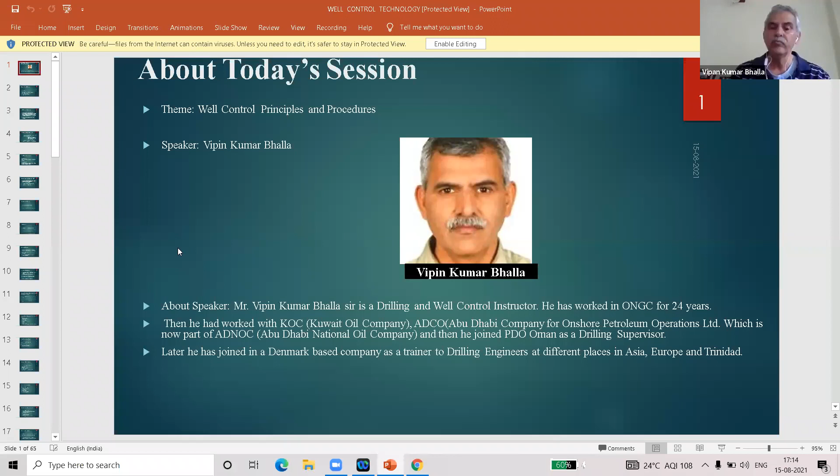In this program, we will be discussing the causes of kicks. First there will be a basic introduction, then causes of kicks, what is primary, secondary, and tertiary well control, what is the blowout preventer stack, and what other equipment is involved in well control, kick detection systems, and finally what are the methods of killing a well.

If we look at what is well control - well control is about not allowing, when we are drilling a well into very high pressurized formations, what is stopping those high pressurized formation fluids from coming into our well? If they come into our well, there will be some obstruction. Our job is to drill with mud and keep drilling. If some fluid from the formation comes into our well, that can be an obstruction, and we don't want that. So when we are drilling a well, what is stopping them from coming into the well? That is the question.

Sorry for the interruption sir, can you switch off your video? I think the voice is breaking. Oh, is it breaking? The audio will become better. Yes, voice is breaking. Okay I'll do that, it's a very interesting topic. Okay, I got a message in the chat box that voice is breaking. Okay, so now it may be better, right? Yes sir, better than before. Okay, it will slowly get better.

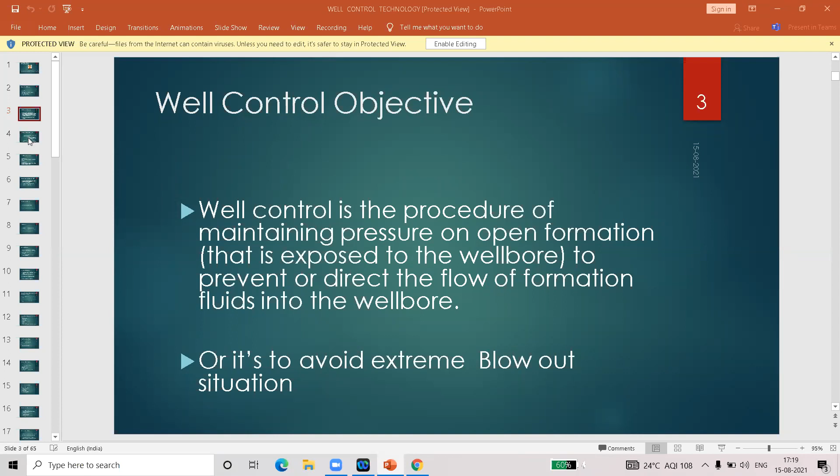Now, as I said, your mud hydrostatic should always be more than the formation pressure. And if it is less, that means you are underbalanced and there is a possibility of a kick. Kick means influx, or formation fluid entering into the well and creating problems for you.

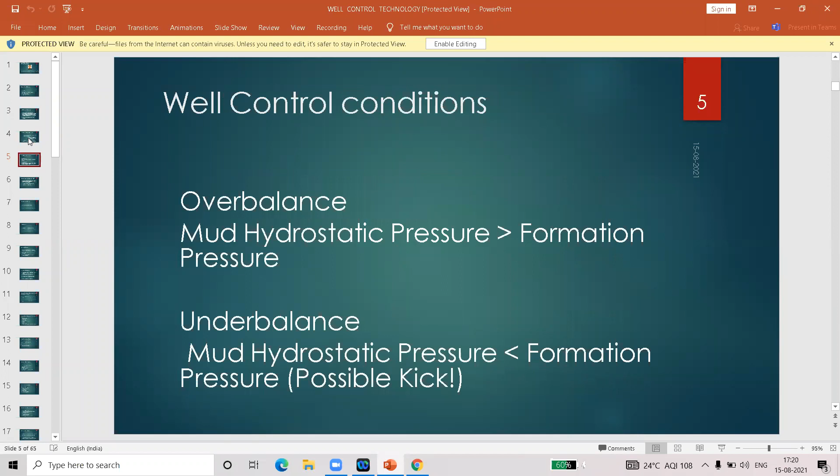What is secondary well control? Suppose some influx happens for some reason, your mud density was not sufficient. Maybe you are drilling a well into a formation which had much higher formation pressure than the density of mud you had chosen. So naturally, formation fluids will enter the well. Now what should be your action?

If suppose you don't do anything, those formation fluids, which can be gas, will come into the well, migrate up, expand, and throw all your mud out of the system and create a blowout situation. And to save from that, we have another element which is BOP. That is the secondary element which can help us control a well control situation once our mud has failed. So mud was our primary barrier, and secondary barrier, if suppose mud fails, is our BOP system, which can be called a secondary well control barrier.

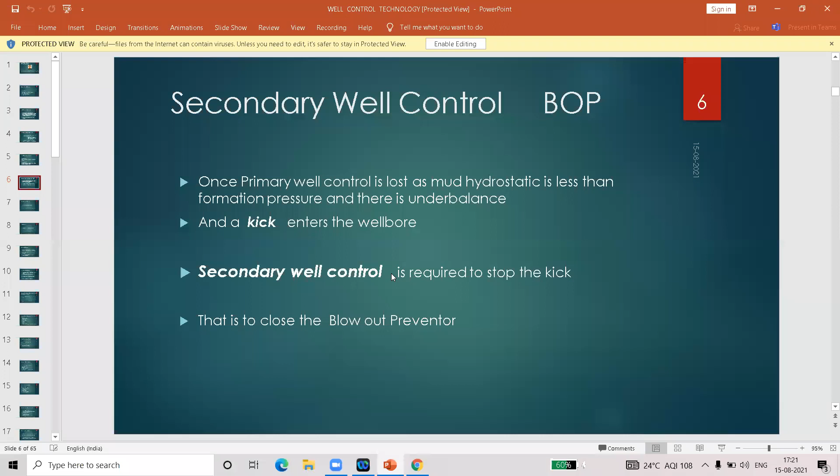To control that, tertiary methods are used, like capping arrangements. Many experts come for that, and they try to cap the area with certain equipment, cranes and other equipment, and then they try to control it. Even if that fails, they may drill another well at a distance and make that well meet this well, and try to push very heavy mud into this well to control it, which is called a relief well. This is a little difficult, so I'll not go much into it.

I'll make it simpler. This is called tertiary well control, which is used when a blowout has happened and you are to control that. It may take 3 months, 4 months, 6 months.

So these are the barriers. As I said, primary is your mud in the well, and secondary is the BOP system with other allied equipments. These barriers should be tested from time to time. If you don't test them and ensure they are okay, they are no more barriers. If you don't measure your mud weight and it's not maintained the way it needs to be, it's not a barrier. If your BOP system is not tested properly time to time, you cannot assume it to be a barrier.

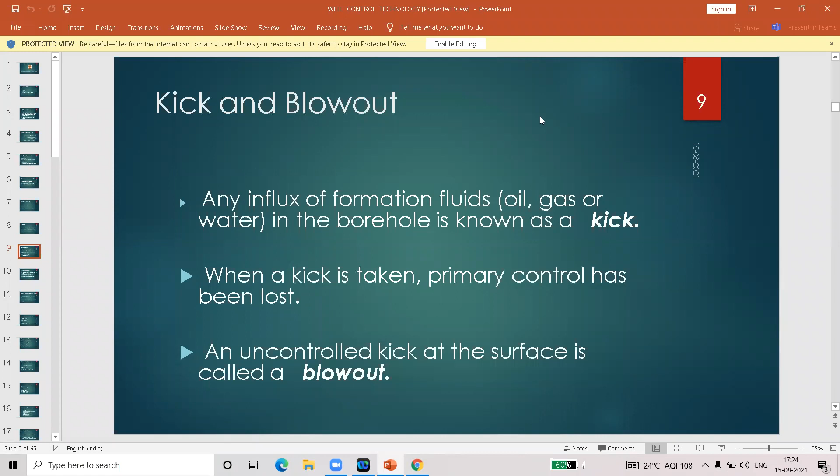So our job is to remain overbalanced. Overbalance is keeping the mud weight such that the hydrostatic pressure at the bottom, because of the density of the mud, is always more than the formation pressure.

That is our strategy, but sometimes you may go underbalanced. You may not be able to maintain a higher mud weight at the bottom. Maybe you drill into a formation which has unexpectedly more pressure than your mud density, so then formation fluids will come in and you will get a kick.

Now, why are such abnormal pressures there in the formation? We should be careful about such pressures which formations may have, that they may come into the well and create problems for us. That is why we should give some attention to what type of reasons create the abnormal pressures in the formation, and what is normal, what is abnormal, and what is subnormal.

What is normal is if the pressure in the formation is because of saline water. All formations have saline water in them. These formations are sedimentary rocks, and sedimentary rocks have pores in them. These pores are interconnected, and they are filled with generally saline water of density, say approximately 8.9 or around 9 pounds per gallon. If the formation is filled with this type of saline water, that will create a gradient of 0.465, and if that is the condition, it will be a normal formation.

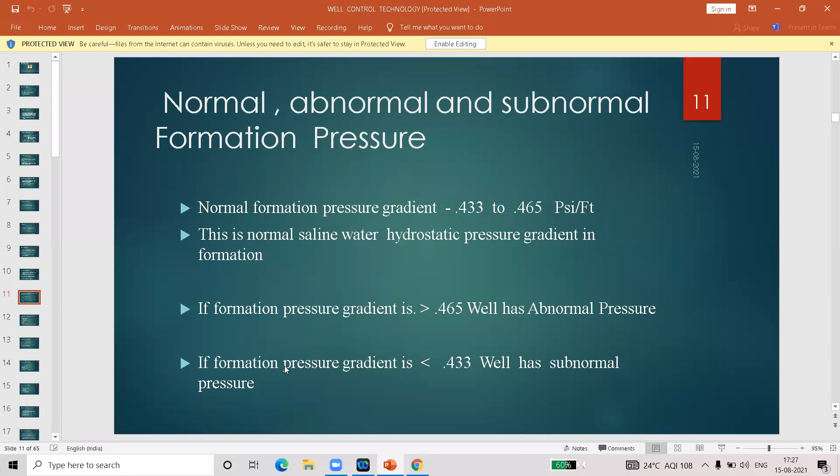Now, why do abnormal pressure formations occur? If we know that, then we can be careful while drilling, knowing we may be entering an abnormal formation zone. In an exploratory well, you don't know what type of formation you are going to encounter. Of course, geoseismic surveys have given some data, but it's a wildcat well. You don't know what you are going to encounter, or what type of pressures will be there. There may be abnormal pressure.

So we should know what are the characteristics of abnormal pressure, why they occur, where they occur, and what will be the symptoms, so that a drilling engineer can be awake, monitor, and catch the abnormal pressure zones before they catch him.

One of the reasons for abnormal pressure is undercompaction of the shale. This happens at the time of sedimentation, if by geological movements a high pressure is created in the fluids at the bottom, and those fluids at high pressure don't get a chance to deplete because of impermeable formations above them. The fluids at certain depth may get high pressure because of earth movements and geological reasons.

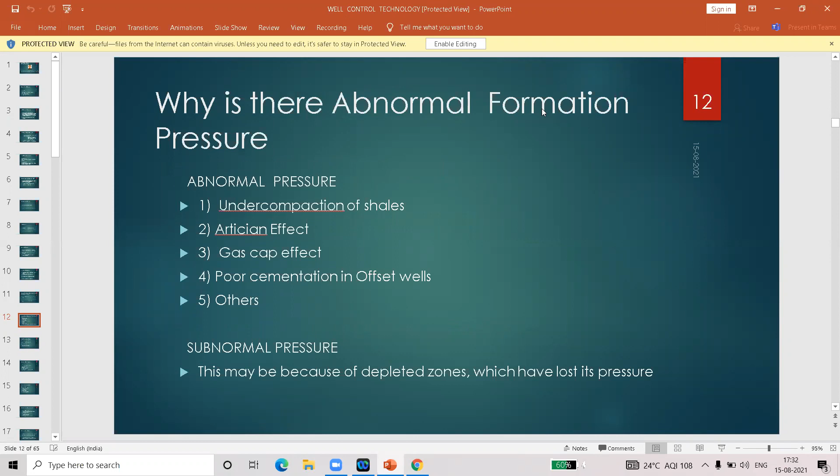The second thing is that your mud density may not be controlled properly, or your mud level in the well may fall for some reason. There can be mud loss, where the mud volume in the well gets lost into lost circulation, causing the level to fall, and that may induce a kick. So you need to ensure that your well is always full of mud.

That mud density creates a hydrostatic pressure at the bottom, which can handle the formation fluid pressure. So bottom hole pressure from the mud density, that hydrostatic pressure, is very important to maintain to ensure no kick occurs, unless some very high formation pressure is encountered.

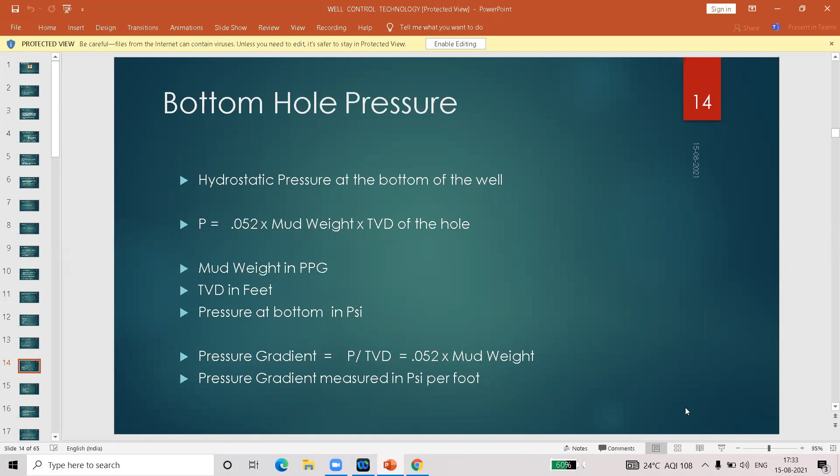Now we will see how to ensure that we catch the abnormally high pressure zones before they strike us with a kick. Now, how can a kick occur?

Suppose your bit is worn and you want to pull it out to change it. Let's analyze this situation which can create a kick. I am drilling, my mud density is good enough, no kick is coming, the hydrostatic pressure of the mud is more than the formation pressure, everything is fine. Suddenly my bit is not drilling anymore, so I want to pull it out. I slowly start pulling out to change the bit. When pulling out, I may be pulling too fast, or my bit may be clogged with cuttings, and it may act as a piston, sucking the formation fluids into the well. That sucking action, like a piston when you pull the string out of the well, can swab formation fluids in, and that can cause a kick.

Or there can be a kick like swabbing, and when you want to know whether the kick is there or not, you circulate the well, and when that kick comes up it will expand, because the pressure at the top is less than at the bottom. So if it is expanding, it will invite more kick. Or if there is lost circulation, your hole is getting empty because of the loss, and the mud which you require to create density and hydrostatic pressure to maintain the formation pressure is no longer available to you because it is getting lost. So that can also create a kick situation.

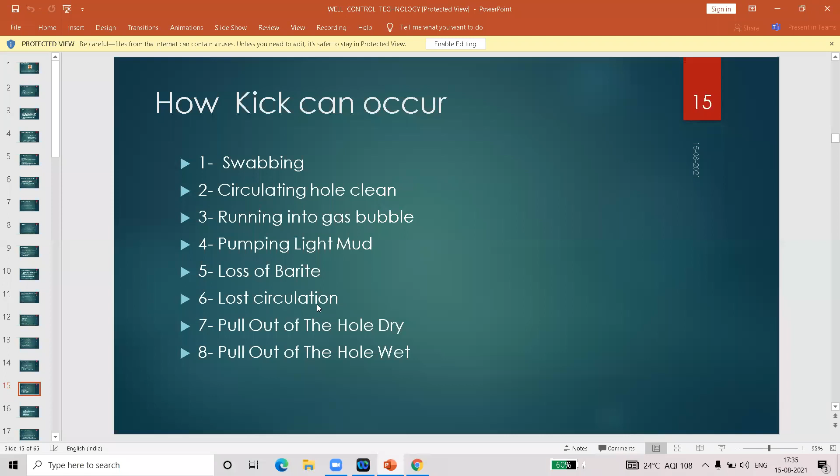This is what mainly I wanted to communicate. We are drilling an exploratory well, and we don't know whether there will be high pressure formations or not. We are unaware; we have some idea about the geology from the seismic data. It is a wildcat well, so not much is known. We are drilling in an unknown domain. So how will you know whether you are going to encounter, or are approaching, a very high pressure zone?

So these are the symptoms. One symptom is that your rate of penetration, the drilling rate, may increase suddenly when you encounter a high pressure zone. Generally those zones are more porous and they are at high pressure. When they are at high pressure, they throw the cuttings which you are cutting with the bit up into the mud stream very soon, and your drilling rate increases. So if your drilling rate unexpectedly increases, you should be careful, be watchful. Number one, there may be a porous high pressure formation zone.

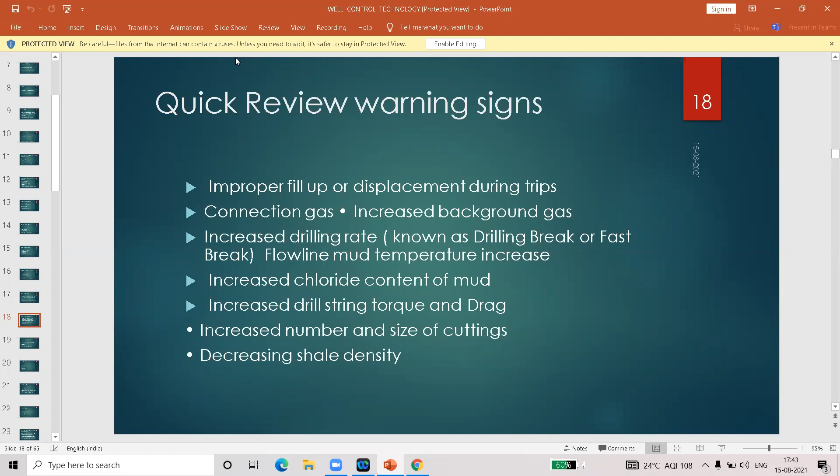This whole monitoring process needs to be done properly to avoid the risk of getting a very big kick from a high pressure formation zone. Now, all of these that I discussed were warning signs, not sure signs. They tell you that you may be going to encounter a high pressure zone, or that you may be approaching one. These are the warning signs.

Then there are some positive signs. These signs don't give you a warning; they tell you that you have already entered a high pressure zone with pressure more than your mud density can handle. If you're drilling and pumping mud into the well, your ingoing mud flow rate should equal the outcoming mud flow rate. But if the flow rate of the outcoming mud is more than the ingoing mud, that shows you have already got a kick. You have encountered a high pressure zone.

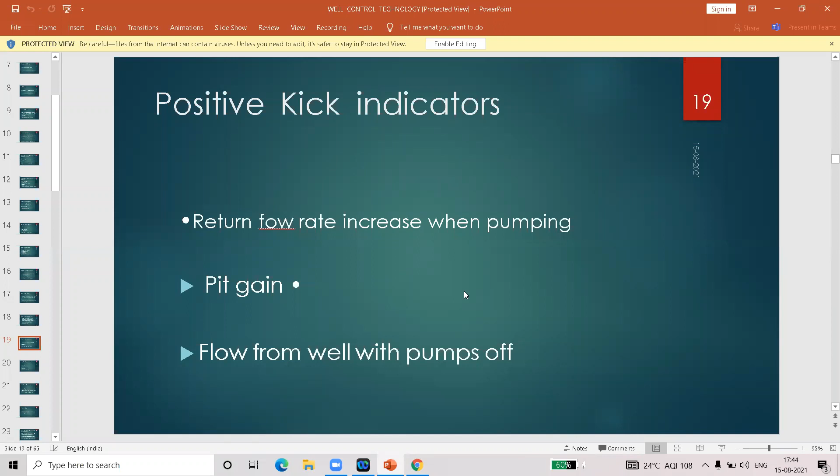Kick is already there. If your pits, from where you are taking the mud, receive the same mud after drilling and that level is being maintained, but if that level is slowly increasing, that shows some influx has already entered your well. These are the symptoms that tell you it is not a warning, it is a positive sign that a kick has happened. And if a kick has happened, what should be your action?

Your action should be a hard shut-in of the well. You will stop rotating the bit, pick up your Kelly or string to a position so that there is no joint inside the BOPs and there is free pipe inside the BOP. Stop pumping, close the BOP, and then open the valves required to record the pressures. That is what a drilling engineer does. This means there was a high pressure zone and your mud weight was not sufficient, so a kick came into the well, but a good drilling engineer followed the hard shut-in procedure, shut in the well, and recorded the pressure. These pressures will tell you how much greater the high pressure zone's pressure is.

Hello, I got one question if you don't mind. Yeah, tell me, ask me.

What can we consider the shut-in tubing pressure before the bullheading technique, if we already bled off the well to zero? Consider we have a bullheading technique to kill the well. We've bled off the well to zero, and we want to kill the well so as to squeeze the static level into the perforation. How much can we consider the shut-in tubing pressure?

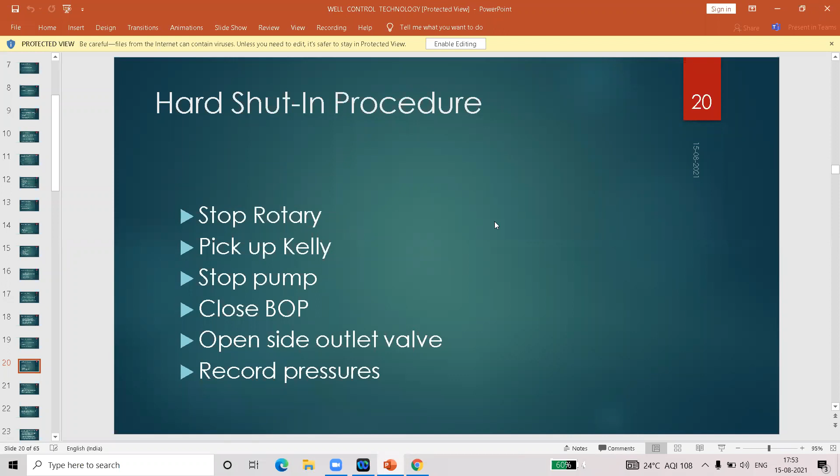Okay, BOP system. Now we will talk about the secondary well control system, BOP, and other allied equipment which are used. So before I do that...

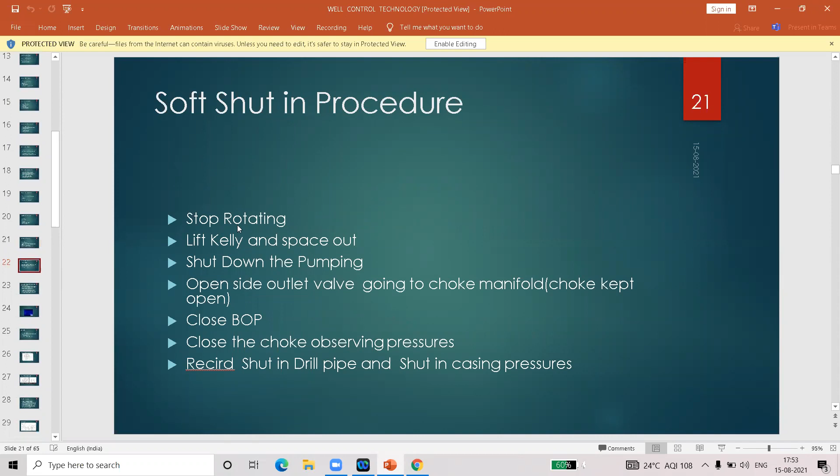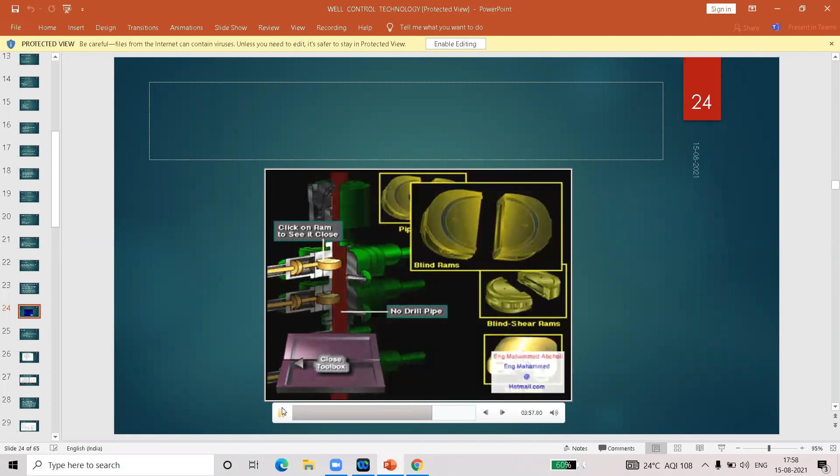Yeah, sir, sorry to disturb. There's no audio in this video, I guess.

Okay, we can't hear anything. All right, so is the audio very poor? I think the audio was muted, we couldn't hear anything. Good, but you could see the diagram and you can see the observation. Yes, sir. I don't know, I have not muted myself, but just see.

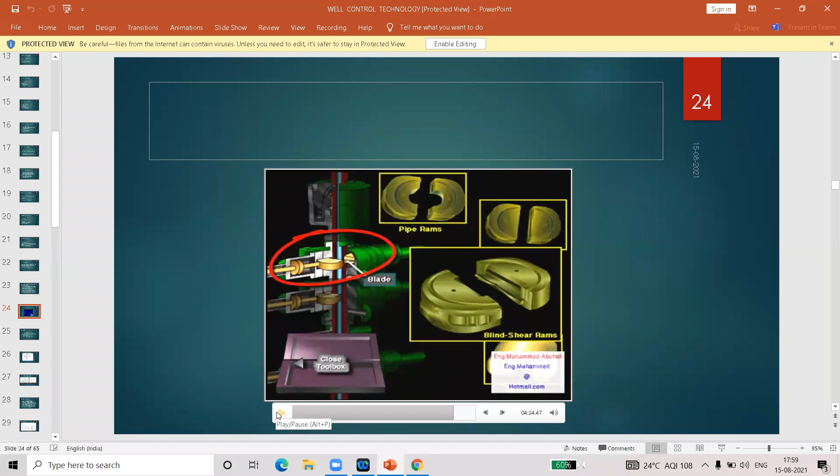It's a few minutes more, just see and observe how BOP works. Variable bore rams, or VBR, are special pipe rams that can close over a range of pipe sizes, such as 5-inch diameter to 3-inch diameter.

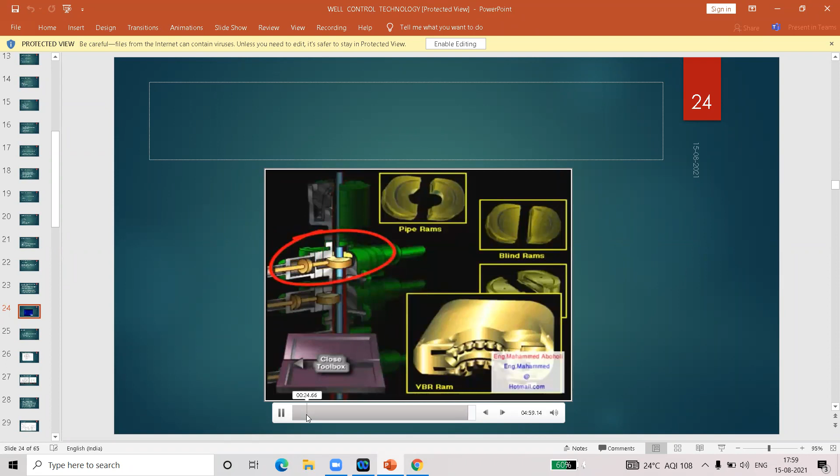Okay, so this was the BOP system. Is my voice audible? Yeah, hello. Yes, sir. Okay, okay, thank you.

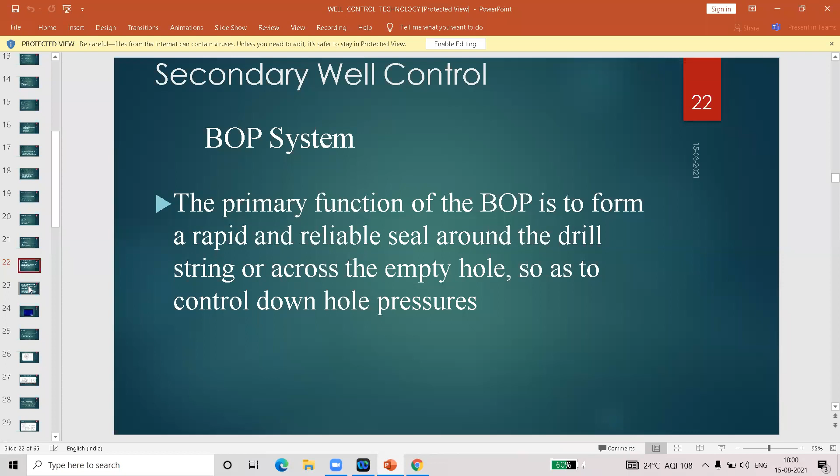This video was the animation of the BOP system to give you a sense of how the BOP acts as a secondary barrier. If the mud, as a primary barrier, fails, then we use the secondary barrier, which is BOP, to close the well, and now the well is closed. Your first job after closing the well involves this secondary barrier, your BOP, of which there are many types, as you might have seen: RAM BOP, annular BOP, blind shear ram, blind ram, depending upon the different situation you act on. If it is a very emergency situation and you are not able to control anything, you may have to shear the pipe and close the well also.

In normal conditions, you may use an annular BOP or RAM type BOP, which you have seen. There are different sizes of BOP and different pressure ratings, maybe 5,000 psi to 20,000 psi, and different sizes depending on what type of well you are drilling. If you are drilling a very deep well, you may need some other size, and if shallow, some other size may be sufficient. Also, how much formation pressure you are going to encounter will decide the rating of the BOP to be used.

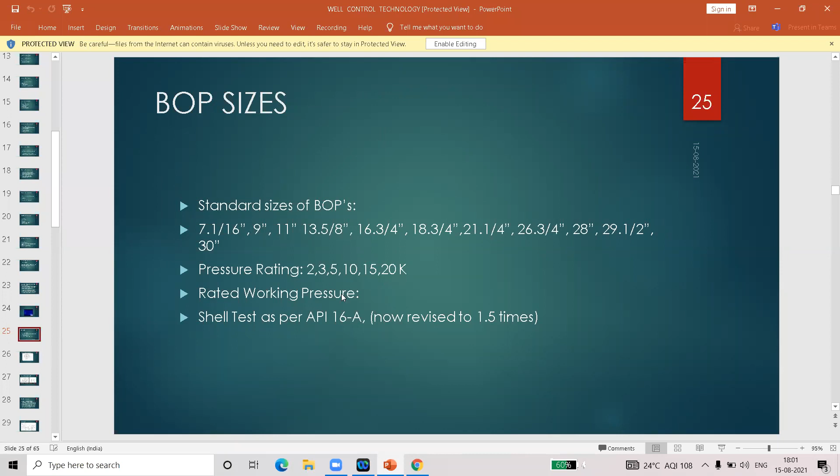So this is one type of BOP, and another is the RAM BOP. It is also operated by hydraulic fluid, which pushes a piston. It has a ram in front with an opening, as seen in the video, which closes across the drill pipe and can close the well.

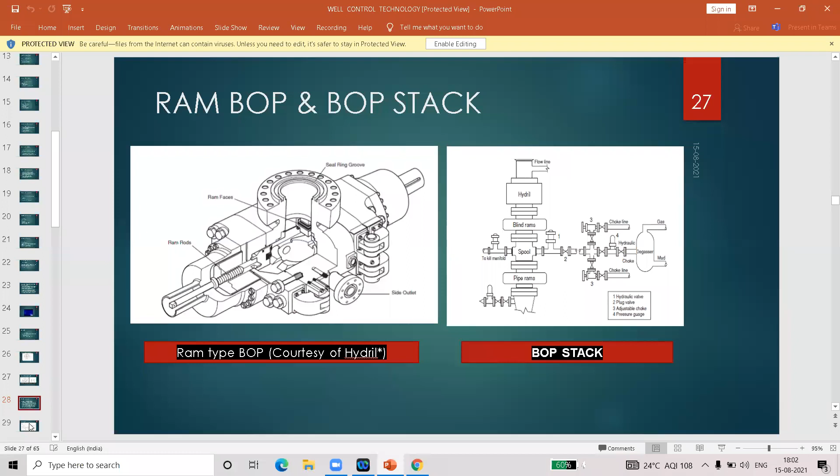This is another type of BOP, and annular is another. These are different types of rams, shaped like the drill pipe, and when pushed, they will close the BOP.

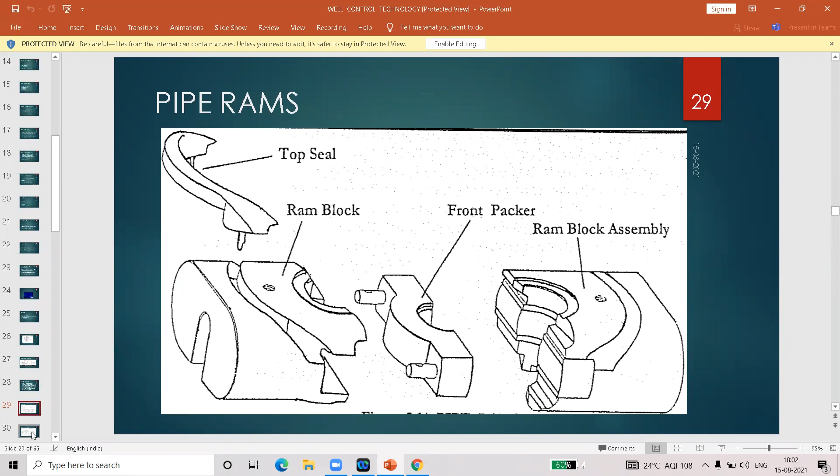One is the BOP. Once a kick has come into our well, we close the well with the BOP and all secondary elements. Now, what about the choke manifold? Once the kick has come, the first job of the drilling engineer is to note down the surface pressures, how much pressure is on the different gauges on the drill pipe or the casing side.

So the drilling engineer's job is to note down those pressures after closing the well. Now those pressures, after closing the well, will tell you the formation pressure you have encountered, which you don't otherwise know. These surface pressures, once the kick has come and the well is closed with the BOP, will give you an idea about the formation pressure.

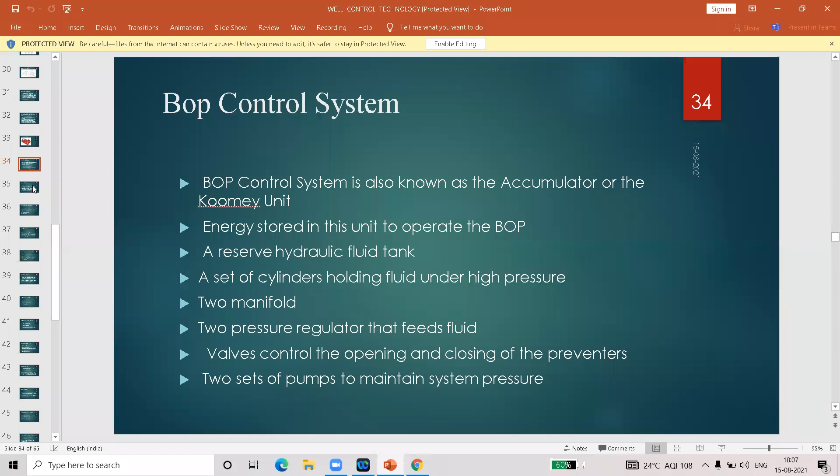Subsea BOP: if you drill with a drill ship in the sea, the BOP will be deep down at the seabed, while the control system may be at the surface. This is an advanced well control system used when drilling with a drill ship in deep water, so you may need a subsea BOP. In surface drilling, you will need an ordinary BOP.

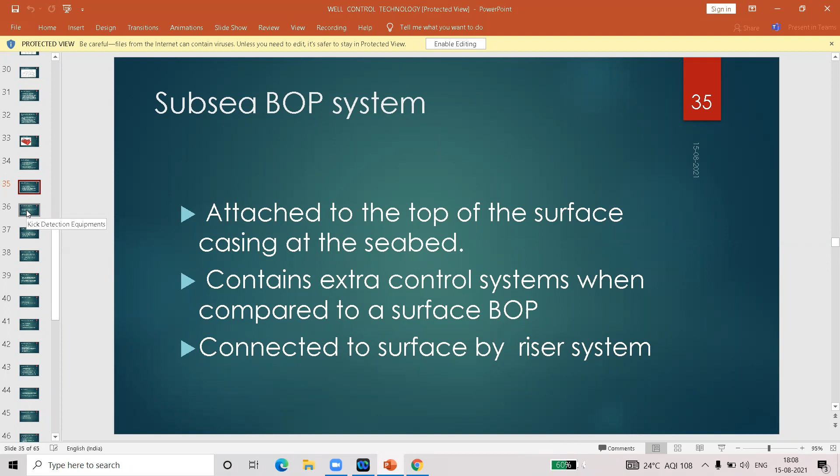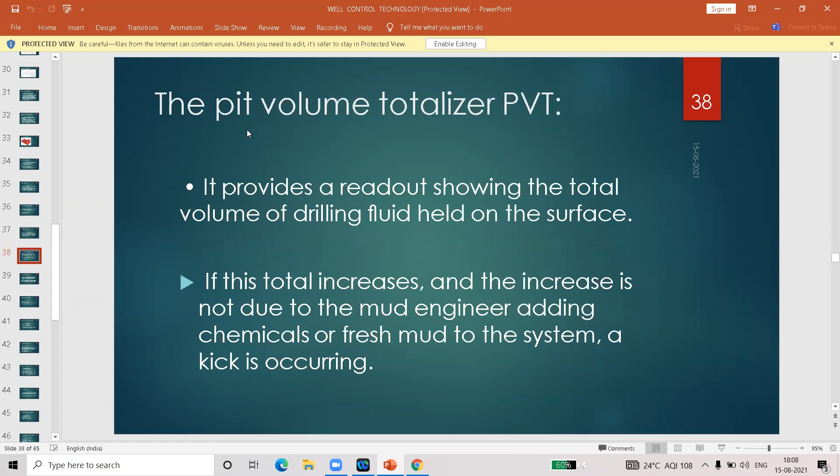So now you have detected a kick successfully, and closed the well successfully using secondary well control equipment like the BOP. The mud gas separator separates gas from the mud when killing the well. There are other equipments that help us, like the pit volume totalizer system and flow indicating system, which help detect the kick.

Now, what is the well control procedure? The first job is to detect the kick. The second job is to close the well, which we do using the BOP. The third job is to remove the formation fluids out of the well. Then the fourth job is pumping heavy mud into the well to make it safe for drilling.

Let's I'll show you a video now. Before I come to drilling well control methods, just see this video. It will give you some idea, and then we can extend that further.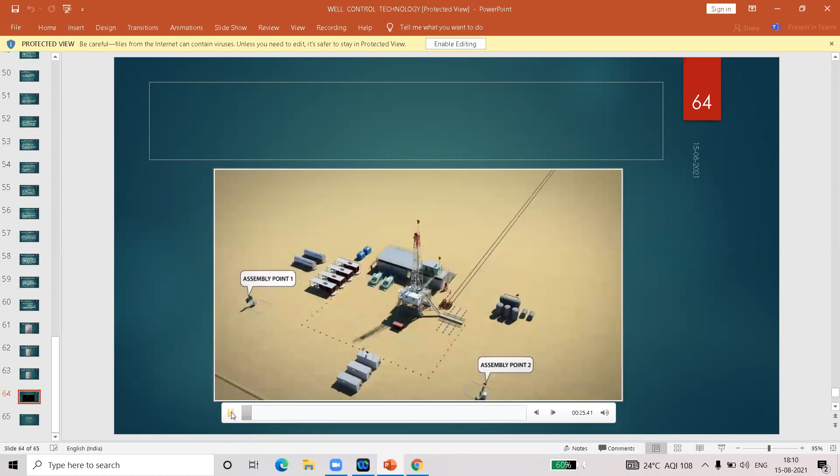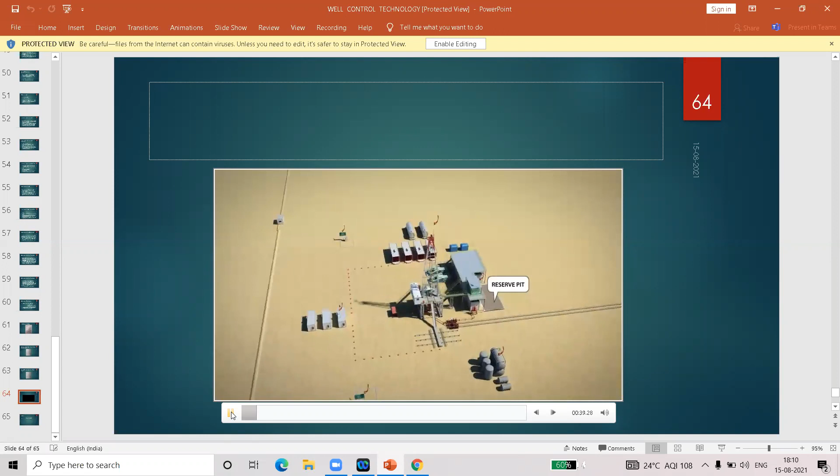Welcome to the ADCO Learning from Incidents series, Well Control and Blowout Prevention. We will be sharing with you information on well control during drilling, the various systems put in place to control a well and prevent a blowout incident from occurring. We will also review the main reasons behind some of ADCO's well control incidents which were handled successfully.

Prior to the preparation of the drilling program, the asset development team submits the final well prognosis to the drilling team. The well prognosis is initiated by the petroleum engineer. The reservoir engineer then makes a planning overview and provides the required formation pressures and temperatures. Then the following data is completed: geodetic data, conceptual data, geological data, reservoir data, geophysical data, and petrophysical data. Once all the data is entered, the well prognosis will be approved by the Reservoir Operations Asset Team Leader and published in ADCO's system.

Let's begin by explaining well control. While drilling, it is essential to perform activities in a safe way, which will prevent uncontrolled flow of formation fluids and gases from the reservoir to the wellbore and surface surroundings. This is called well control. It includes measures, practices, procedures, and equipment for workover and completion, as well as the installation, repair, maintenance, and operation of surface well control equipment.

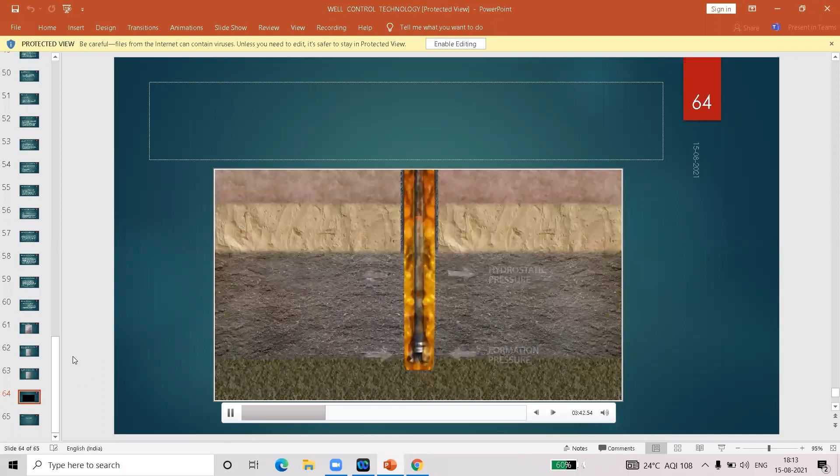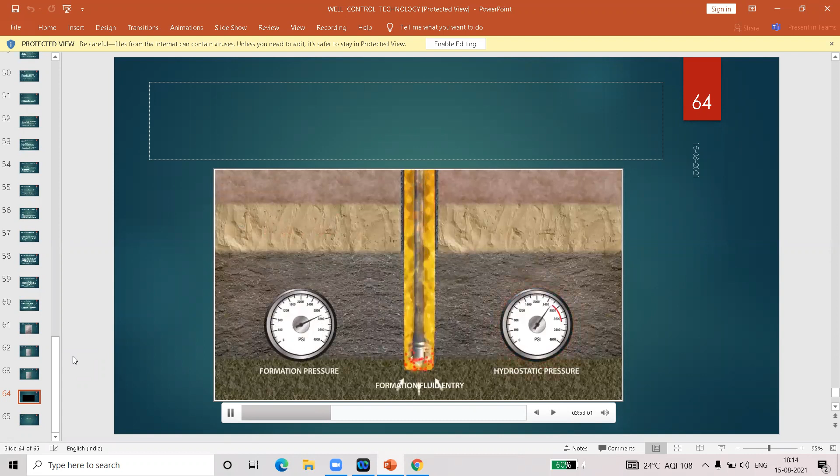It also consists of well control barriers, divided into primary and secondary barriers. The primary well control barrier is the fluid column hydrostatic pressure, referred to as wellbore pressure, that provides overbalance against the formation pressure. This column must be monitored and maintained during drilling and tripping to prevent formation fluids from entering the wellbore. During drilling, if the fluid column is not maintained with adequate mud density, making the formation pressure more than the hydrostatic pressure, formation fluids will find a way into the wellbore and a kick will occur. In this case, the well must be secured and killed.

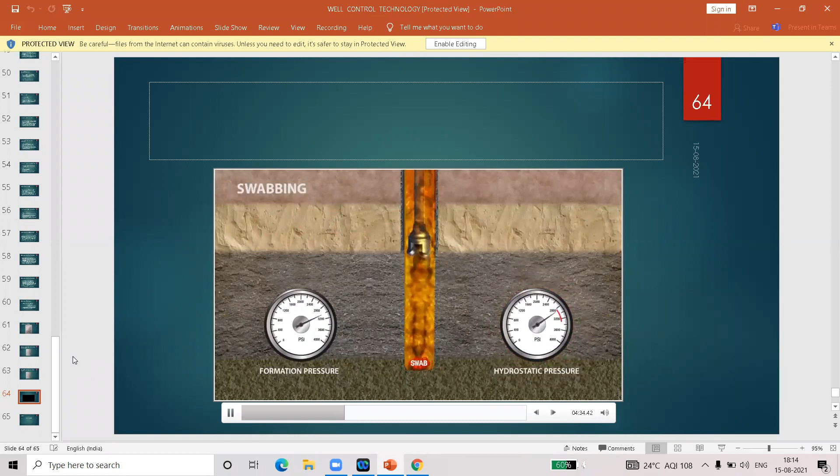There are other cases when a kick can occur. Let's review some of them. While tripping, if there is a failure to keep the hole full of mud to maintain adequate hydrostatic head, the hydrostatic pressure will be less than the formation pressure, inducing a kick. Swabbing, or pulling out of the hole too fast, can produce a suction effect, resulting in a decrease in bottom hole pressure large enough to allow formation fluids to enter the wellbore, creating a kick. When drilling takes place too fast and into depleted reservoirs without proper enforcement, it can lead to cracking in the walls and thus losing fluids into the formation, inducing a kick.

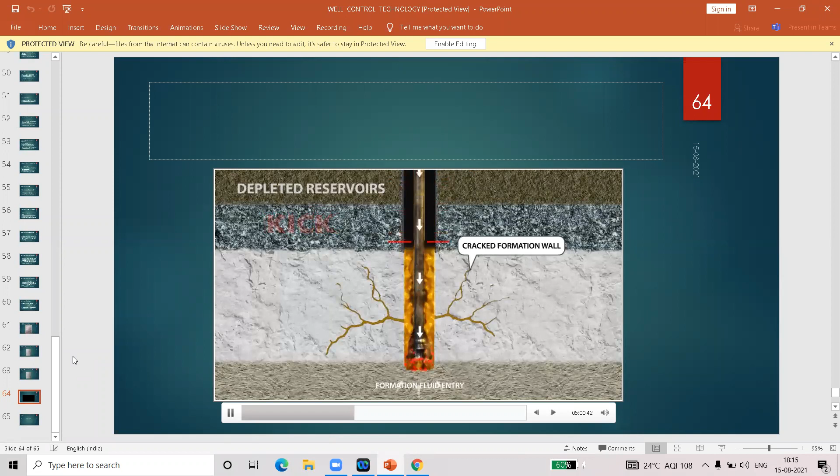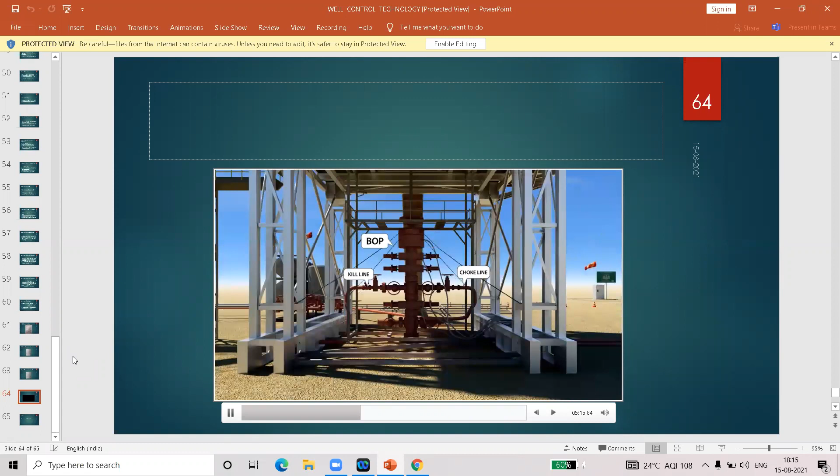Once a kick is detected, the secondary well control barrier, the blowout preventer (BOP), must be activated immediately by the driller to secure and shut the well for killing operations. This is done by closing the BOP using one of the BOP control panels, one situated on the rig floor and the second in the Koomey unit. The driller will shut in the blowout preventer to stop the flow of formation fluids out of the wellbore.

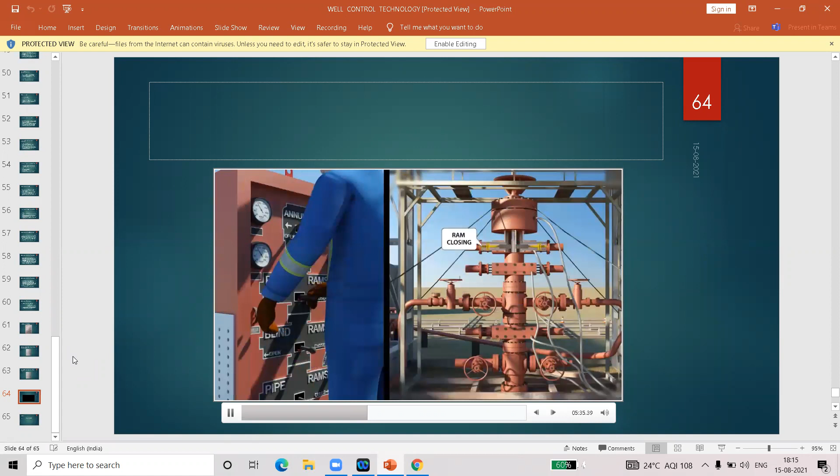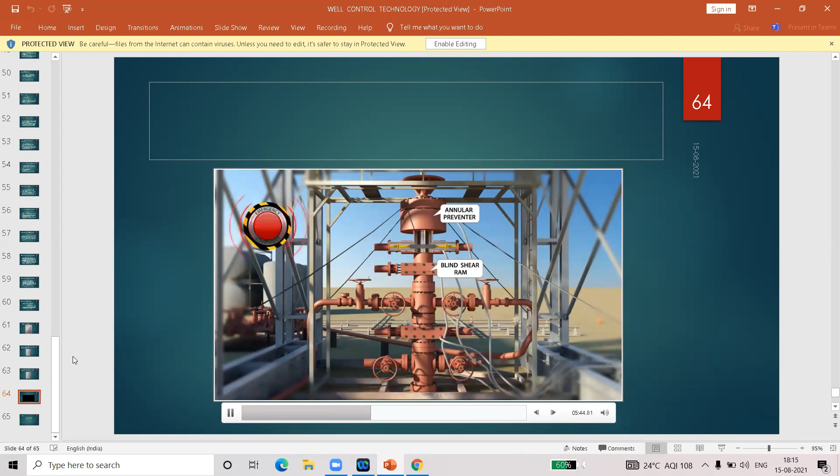He will activate the alarm and notify the ADCO drilling supervisor and rig manager. Meanwhile, at the rig site, the on-scene commander, the ADCO drilling supervisor, will notify the Abu Dhabi Telecom operator and the assets control room, and raise emergency tier 1, which activates appropriate emergency response teams. Unnecessary crew will be evacuated to the nearest assembly point.

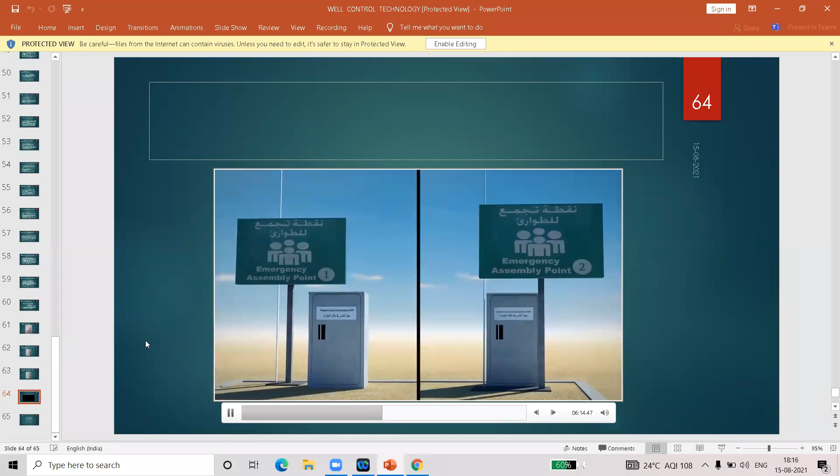The next step is to monitor the shut-in drill pipe and shut-in casing pressure gauges. The kick will be circulated out of the wellbore using the driller's method, first cycle, by pumping drilling fluid downhole and getting returns from the annulus through the choke line to the choke manifold. The degasser will remove gas, and toxic gases will be flared. Once the kick is out, the well will be shut in again.

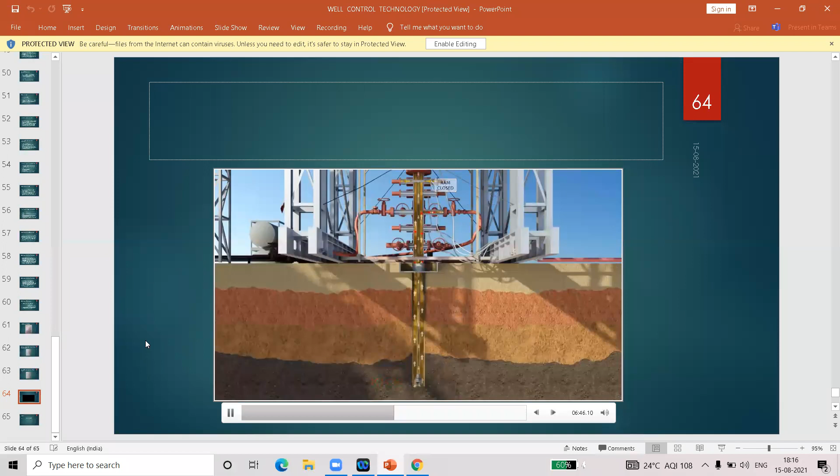Then the well will be killed with weighted mud by circulating the kill fluid until both drill pipe and casing pressures reach zero. If all well control barriers fail, such as human barriers, BOP equipment barriers, and system barriers, and the BOP leaks while circulating the kick out, this could lead to uncontrolled flow of formation fluids and possibly a blowout.

So we have now, as we were discussing, an influx, and we have closed the well by closing the BOP. If we don't do that, and if it leaks, there can be a blowout. But let us say we have succeeded in closing the well. So what is the job after closing the well?

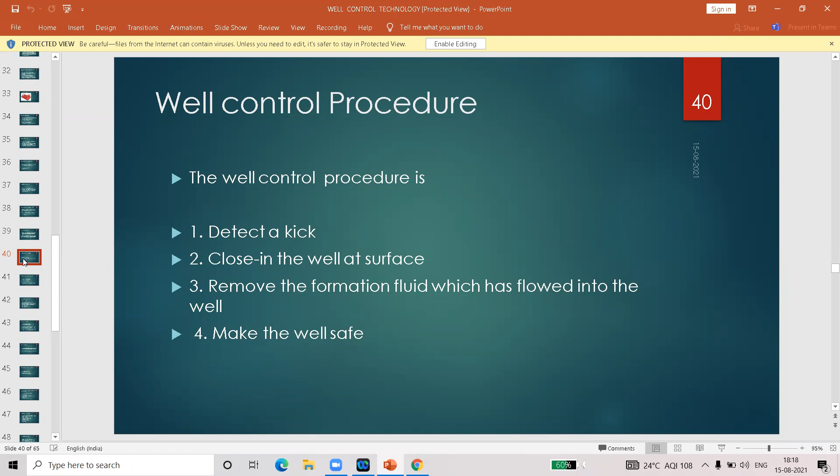Once you have closed the well, another point is that whenever a drilling engineer goes to his rig, he always checks that when he pumps slowly, say at 30 strokes per minute pumping rate, that is the drill rate. But he always keeps check on how much pressure there is when he circulates slowly, because when you are killing the well, you will be circulating at a slower speed than your normal mud circulation speed. That is why he notes down these pressures beforehand.

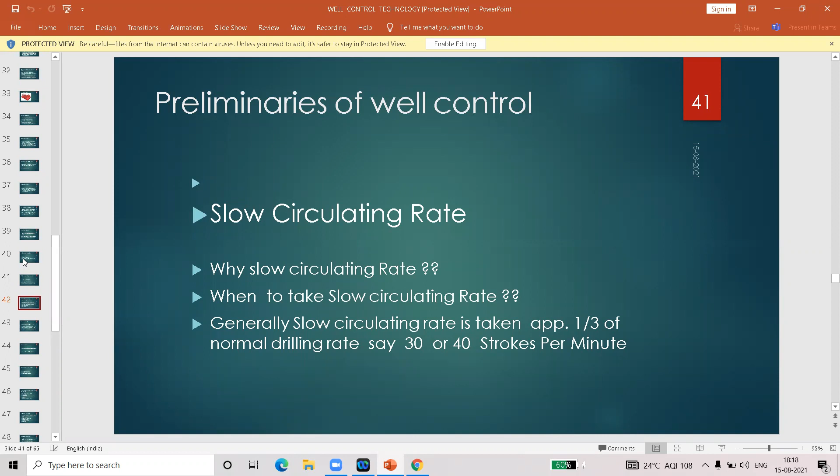Also, he will note down how strong his formations are, so that at the time of kick control those formations should not collapse. That is why he will do a leak-off test beforehand to know how strong his formation is, and to ensure that while killing the well he should not break down his formation. That is why he will keep this formation data always with him while killing a well.

So now comes how to kill the well. Kick tolerance is also calculated from the data of the fracture gradient and the formation pressures. A good drilling engineer should ensure that he gets a kick below the kick tolerance. If he gets a kick more than the kick tolerance, he will break the formation while killing the well and create an underground blowout.

That is why drilling engineers are busy calculating, once they are drilling a well, from the pore pressure data and fracture gradient data, how much kick they can tolerate, and ensure that the kick they get should not be more than the tolerance, which can be calculated from the data they have.

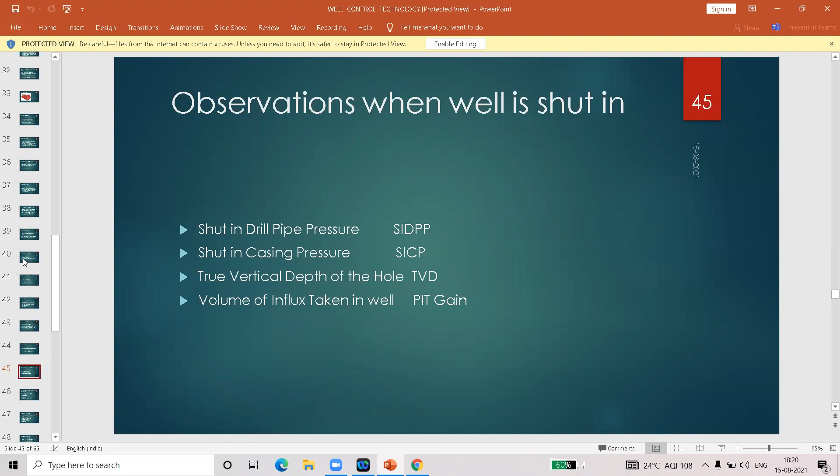So the drilling engineer is equipped with all the information to kill the well. When he is shut in, he will note down the shut-in pressures, which will give him an idea of how much pressure is there in the newly encountered formation, and how much mud weight will be required to kill that, so that he can proceed ahead with the drilling.

Then there are a few methods to kill the well. The main job of killing the well is that you have got an influx or kick in the well. The first job is that the kick should be out. The second job is that a heavy mud, good enough for the new formation, should be pumped in. These are the two jobs. If these two jobs are done separately, like first circulation to get the gas influx out, and second circulation to put the heavy mud in, that is called the driller's method.

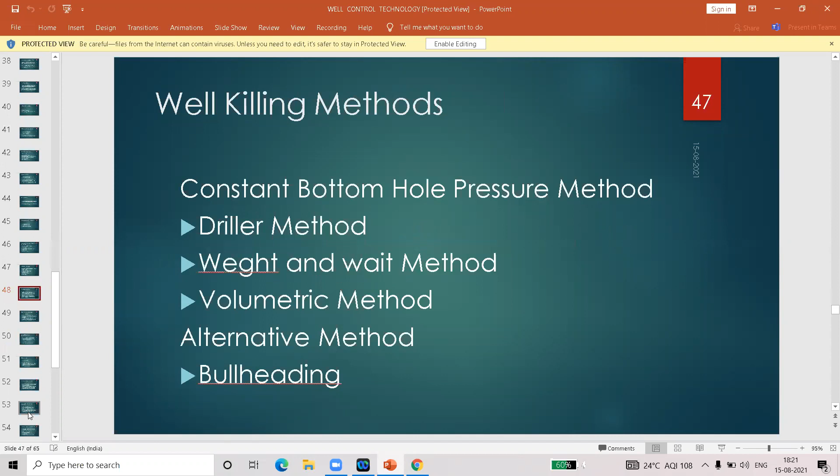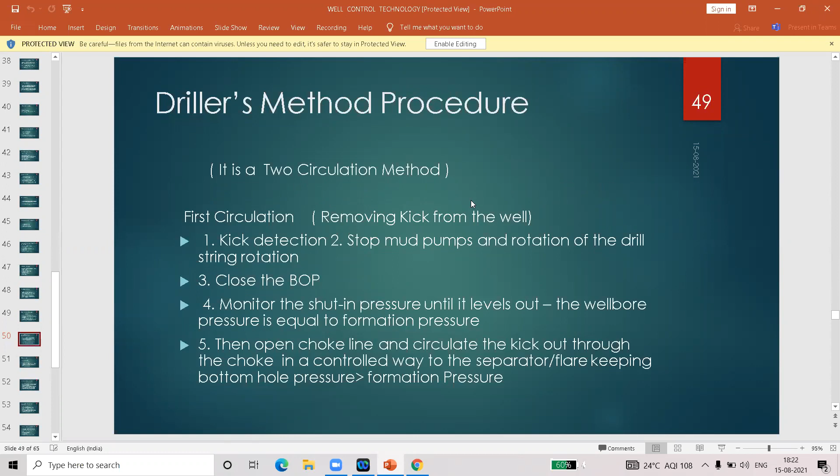In the driller method, there is first circulation, taking the influx which has entered the well out of the well, and second circulation, after calculating from the surface pressures, there will be certain calculations, and he will know what mud weight, mud density will be required for killing the well. Say in this particular example, it is 13.7 pounds per gallon.

So the engineer will make the mud ready, and after the mud is ready and the influx has been circulated out, he will start pumping this heavy mud in a controlled way into the well and fill the whole well with this mud. After this mud is put in, he can go ahead with drilling further. So this is the driller method, in which first the influx is taken out, and in the second cycle, high pressure, high mud weight, high density mud is pumped in.

Then there can be another method, the wait and weight method, in which straight away you go with the heavy mud, and with the heavy mud only you can take the influx out. That heavy mud will be pumped in and will push the influx out, and the influx will be taken out and heavy mud will be pumped in, both at the same time.

So this looks so far very simple, but let us see how much is involved in this. It's not that simple as that.

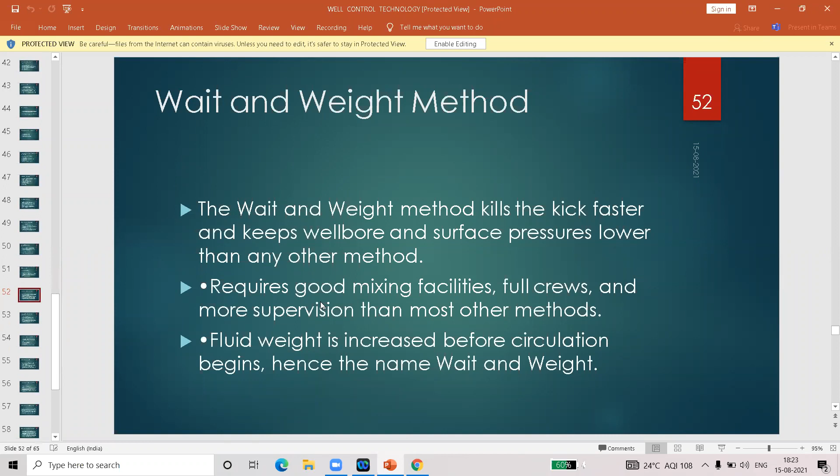He should know what is the open hole volume. He should know what is the cased hole volume. He should know what is the capacity of the pump. He should know what killing rate, at what speed he wants to kill.

He should know beforehand what are the pressures which will be encountered if he kills at that particular rate. That should be clear to him. He should know how much volume of mud one stroke of the pump gives.

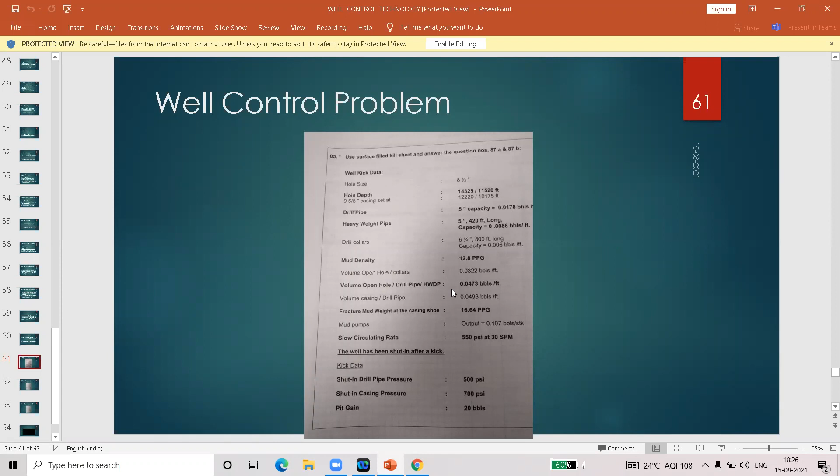So this is the data for a drilling engineer to kill the well. Then this is the first page of the kill sheet, in which he will do certain calculations.

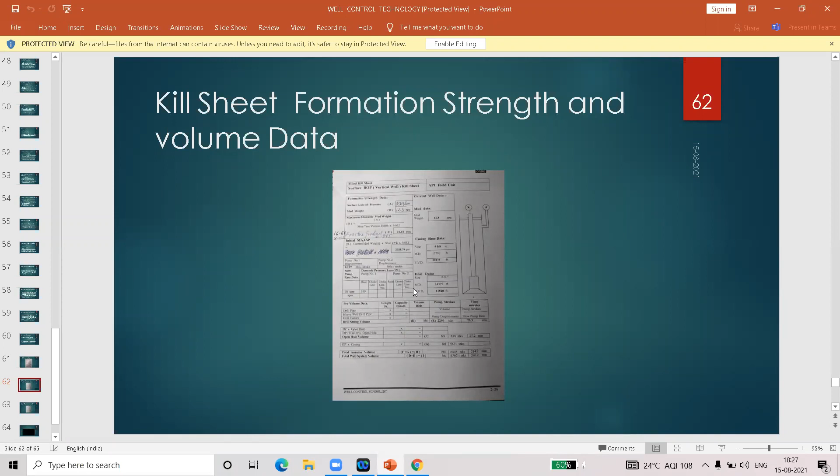He will do some formation strength calculations. He will do certain volume calculations, so that he is clear how much is his drill string volume, how much is open hole volume, how much is cased hole volume, how much is the bottom to surface volume, how much is the whole cycle volume. Why? Because he is to take the influx out and replace it with the heavy mud. So all these volumes are very important to him, and a drilling engineer does all these jobs on the rig.

This is the most important page. In this page, the drilling engineer, from the surface pressure data which he has got after shutting in the well on a high pressure zone which he has encountered, has got a drill pipe pressure, he has got a casing pressure, and he knows the true vertical depth and the mud density which he had been drilling before.

From that calculation, he will come to know what kill density will be required for him to kill the well effectively. He also knows what is the pressure when he will slowly kill the well. So that's the most important thing. I'll try to make you understand, though it may not be that easy.

So when he has shut in, he should know how much pressure will be required at slow rate. All the well will be killed at a slower rate, so that minimum pressures are there on the formations and they don't fracture. So at that slow rate circulating, how much pressure from the pump is required to make that circulation - that a drilling engineer should be clear. Say 600 psi, 600 psi is the pressure.

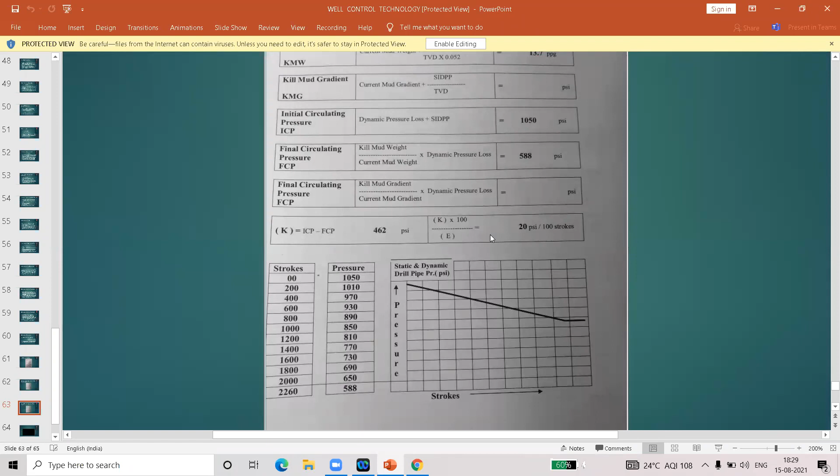Just 1 minute. Okay. So say 600 is the pressure for circulating through the well at a slow rate with which we will be killing.

If that is known, we know in the static condition in the well that formation is pushing into the well at the surface, say a pressure of 500 in the static condition. If you get a pressure of 500 after closing the well in the static condition, that means the formation is stronger than your mud by 500 psi. That is why that formation is pushing your mud and giving at the surface 500 pressure. That means your mud hydrostatic, your mud column, is weaker than the formation by 500 psi.

Okay, so 500 is required for that, and 600 is required for circulation. So the driller will start with 600 plus 500 - 600 to maintain the circulation and 500 to manage the formation, because 500 is required with the existing mud to maintain the formation, since the formation is stronger than the mud weight by 500. So total 600 plus 500, 1100 is required on the circulating pump. That means 600 will be taken by the circulation and 500 extra will create a pressure for the formation fluid not to enter into the well.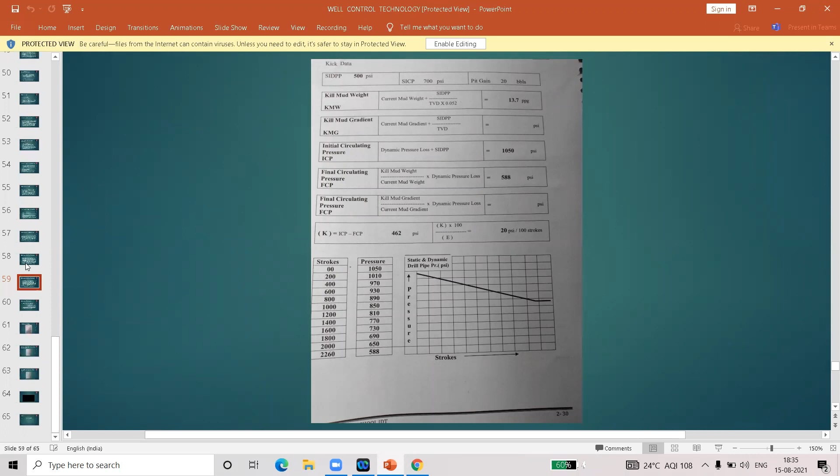I think I am over, that's all from my side. Time was going very fast, and in 1.5 hours I have skipped through certain topics, which I can now take up in 3 more minutes if you want.

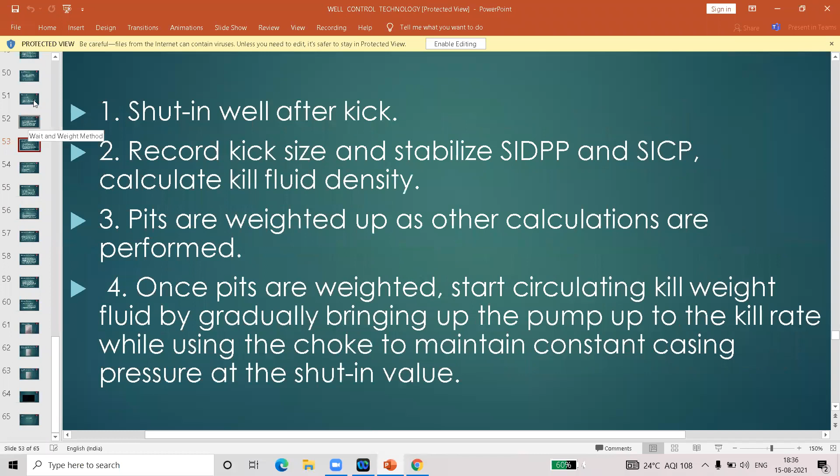There are a few methods by which a well is killed. The first is the driller method. In the driller method, in the first cycle you take the influx out, and in the second cycle you put the kill mud or heavy mud in. If this is done in 2 cycles, it is the driller method. If it is done in only 1 cycle, pumping heavy mud straight away and taking the influx out with the same heavy mud, then the well is killed in one cycle.

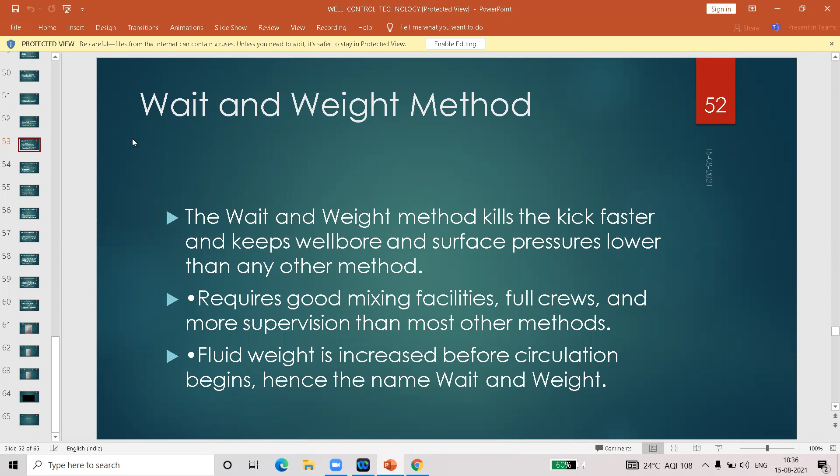This single-cycle approach is the wait and weight method. In special situations, if the string is out of the well, the pumps are not running due to power shutdown or pump failure, or your drill string is choked and you cannot circulate through it, then another complicated method called the volumetric method is chosen. We have tried this volumetric method in Bombay High; it takes somewhat 7-15 days to kill the well with this method. If your drill string is choked, pumps have failed, or you are out of the well, in such conditions you can choose to do the volumetric method.

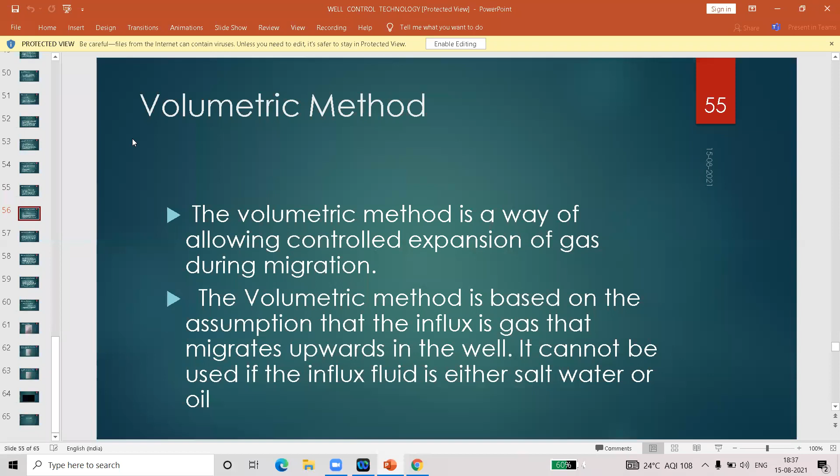There is also a method called bullheading, which that person was talking about in the beginning. I have used this method in Kuwait when doing HPHT wells. In this method, if the influx has come into the well and your formations may be weak, or your influx may be more than your kick tolerance, and you find that circulating the well to kick it out can break the formation or create surface pressures you may not be able to handle, then if the formations are receptive, you can pump from the top and push the influx back into the formation.

So if the kick comes, you need not circulate the kick out at all. You simply close the BOP and pump high pressure mud in, and that pushes the kick back into the formation. After certain further calculations, you will finally be able to kill the well on the BOP and drill further. So bullheading is one of the methods used, which I have used myself in almost every well we drilled in KOC Kuwait, though it requires the formation to be receptive to taking the kick.